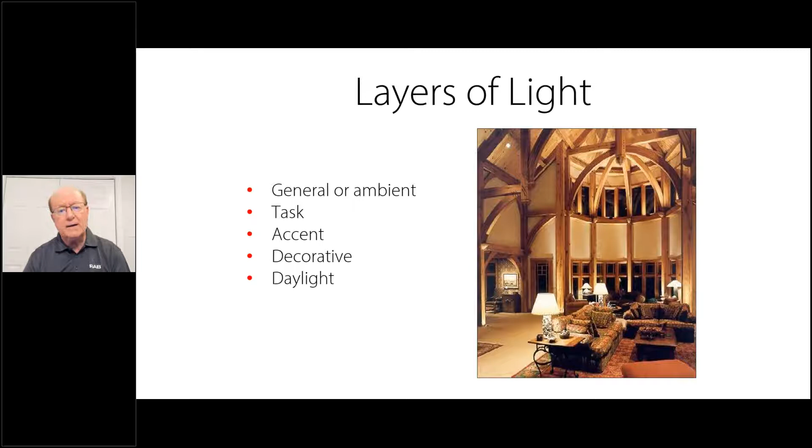So if we take a look at this, let's identify the layers of light in this particular photo. So the first one we have is general ambient. So you have your downlights and you also have your table lamp there. And we'll talk about one more in just a few minutes that I didn't cover right here, and you'll see why. The next one is task. So there's our table lamp for a particular task. We're reading something. Next is our accent over there with a whiteboard.

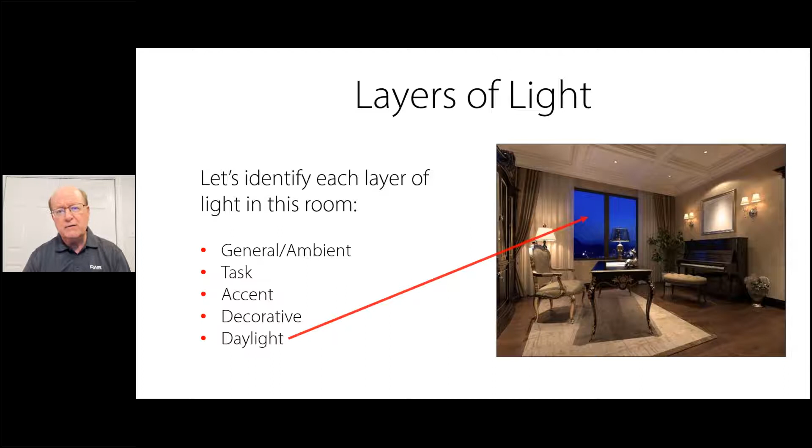And then we've got our decorative, and the decorative is providing some ambient light as well, but it's the decorative layer. And then daylight. So those are identifying what the different layers of light are, and they all combine to make the mood and the setting for that particular room or area.

Now, we have a handout here called What Is in the Ceiling. And so you see across from left to right, recessed housing, junction box, you've got a hole, or it could be just framing. And then down the left side, you've got various products that we offer that can go in and what would go where. So I would invite you to look into this one. It's on our website to find out what goes where as a handout.

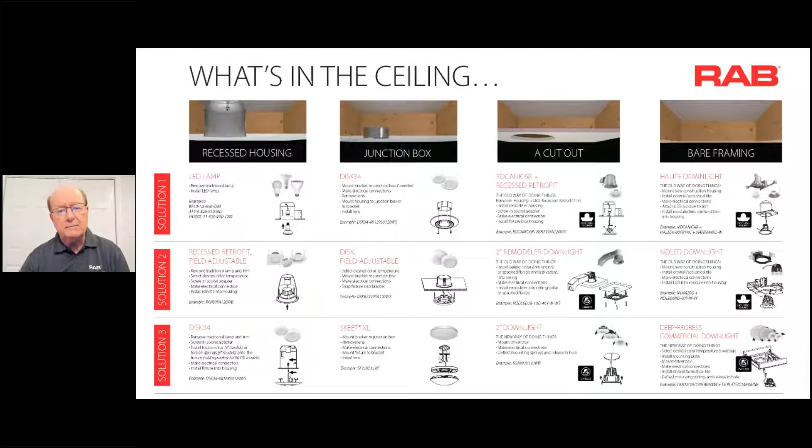Now, the next product we're going to talk about is our SKEET XL. So take a look at this, and it's a low profile, uniform light without pixelation of LEDs. And that's done by the spacing of the LEDs as well as the lens. We have it in CRI of 80 plus. It's TRIAC 120 dimming, and it mounts to a junction box as well, and it provides a wide distribution of light.

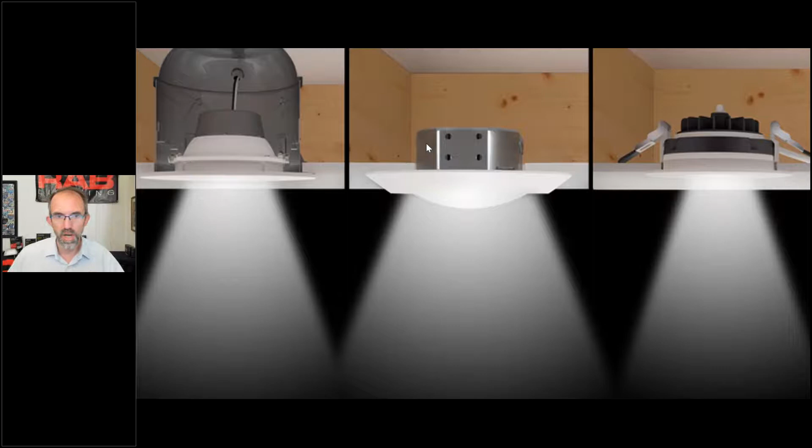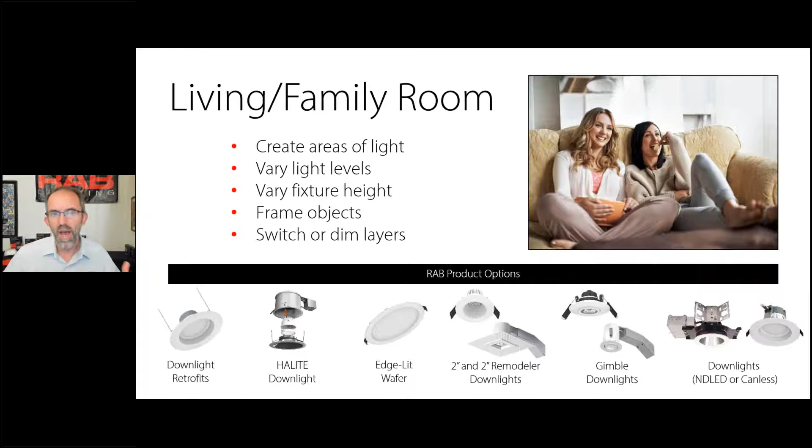Now, why or how would you want to use these different types of light fixtures? So let's look at just the downlight retrofits. The downlight retrofits are for where I need to use an existing housing. You have an existing housing up there in the ceiling. You want something that's simple and easy, toolless, and potentially have some color trims available with this.

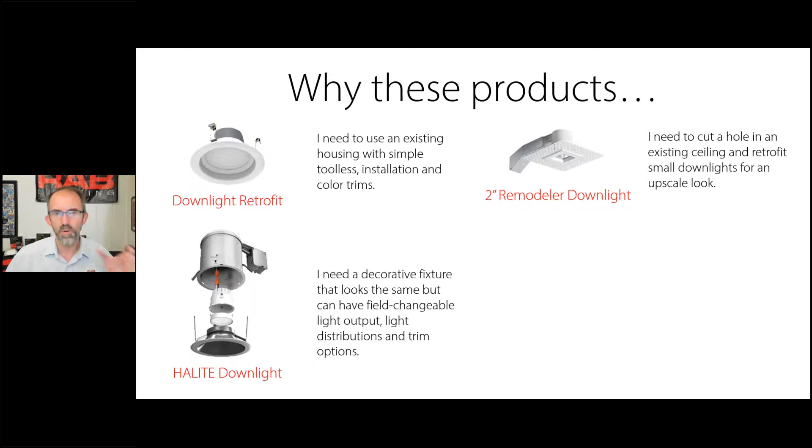The next one: I need a decorative fixture that looks the same but can have field changeable light output, field changeable distributions, and also field changeable trims. So we have the HALITE as a potential option of going up inside and having it be recessed. Next, we have the 2-inch remodeler. Cut a hole up in the ceiling. We want to be able to have a small look to create an upscale type situation.

Next one that I have is the Wafer Downlight. I need a downlight, but I don't have a socket, J-box, or housing. So you cut a hole in the ceiling, you put it right up inside. And the last one is a modified version of that wafer, except it's either a 2-inch version, cut a hole in the ceiling, put a 2-inch fixture up there, or we have a gimbal product. So let me go into each one of these to help us understand why you would want to sell it, why you would want to buy each one of these.

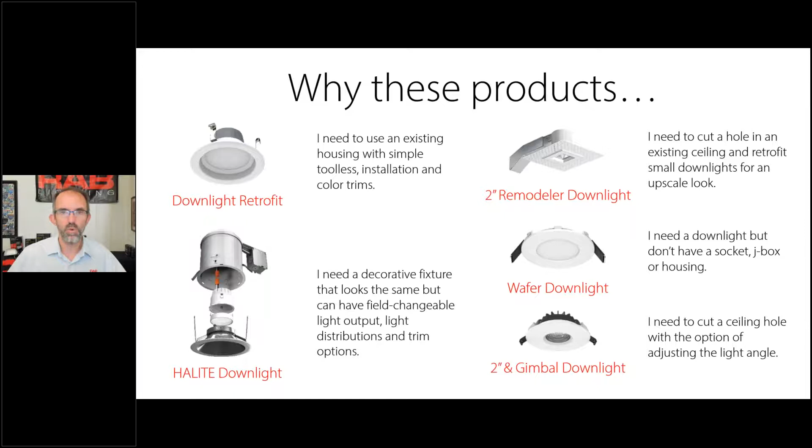So the first one I have here is our retrofits. This is the product that doesn't come with a can. It's designed to go into an existing can. So you have the medium base socket on one side, and then you have a plug, and then you actually plug this either 4 or 6-inch smooth or baffled. On the right, we actually have a baffled version of the 4-inch square or the 6-inch square.

Now, depending upon the size of room and how tall your ceilings are, I would think that in most residences, you're going to be using more along the lines of the 4-inch retrofit or the 4-inch square, these two different versions here. So to make this product even more palatable, we used to only have them available in white.

Now, for the round versions, we actually have a little trim adapter that goes right on the unit. So we have a black, bronze, and a silver trim. It's available in both baffle and smooth, and in 4 and 6-inch. So you can now change the look of that white trim and make it look slightly different depending upon the design of the interior space.

120-277 is probably not too much for residential use, but we do have some versions that go all the way up to 277 volts. And then we can see the field adjustable. So if you have a variety of different customers that have different preferences and you're not sure exactly what that customer wants, you can buy the field adjustable version so that you can tune in the correct light color to match the interior design of the space.

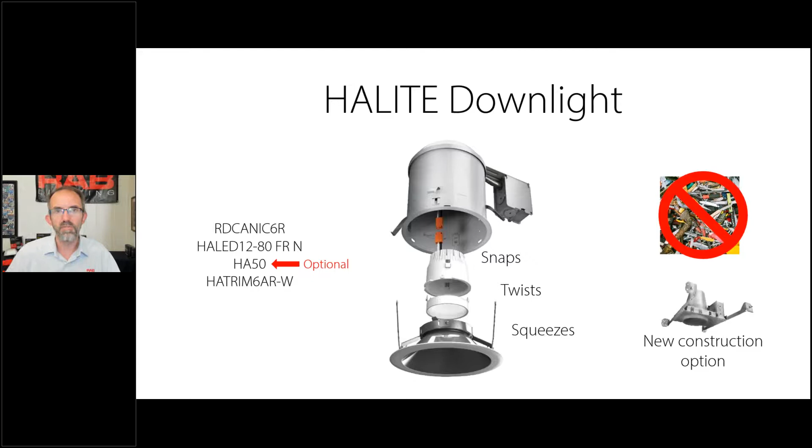And the last piece of the puzzle is the trim. So we have a variety of trims in different colors. The module, the optics, and the trim all snap, twist, or squeeze together with no need for any tools. To get the new construction or remodeler housing up into the ceiling, you're probably going to have to use some tools. But once you get that housing up in the ceiling, everything snaps, twists, or squeezes together with a HALITE. And you get a variety of different styles, looks, light outputs and distributions with the HALITE.

The next one that we have is something we call our 2-inch remodeler. We've had this guy for a very long time. It's been a nice, good mainstay of our product portfolio. We have a little collet: cut a hole in the ceiling, put the collet up inside, make your electrical connections, and you can push this unit right up inside. It can come in contact with insulation.

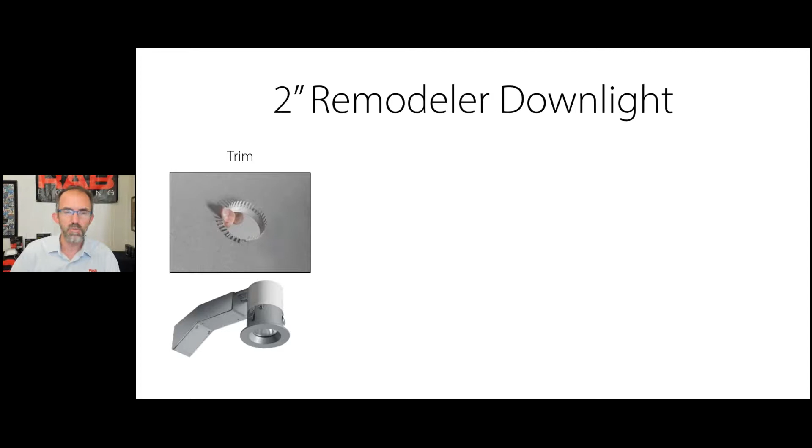We also have a trimless version. So we have that spackle flange that you can screw up to the ceiling and mud right up to it so that you have a nice seamless look on the ceiling. And then we have a new construction housing that uses the 2-inch remodeler inside. It goes up through the hole, and off to the right of that housing you can see a little C-shaped thing. That's where the driver portion goes up through and lands, sitting right on that clip on the housing.

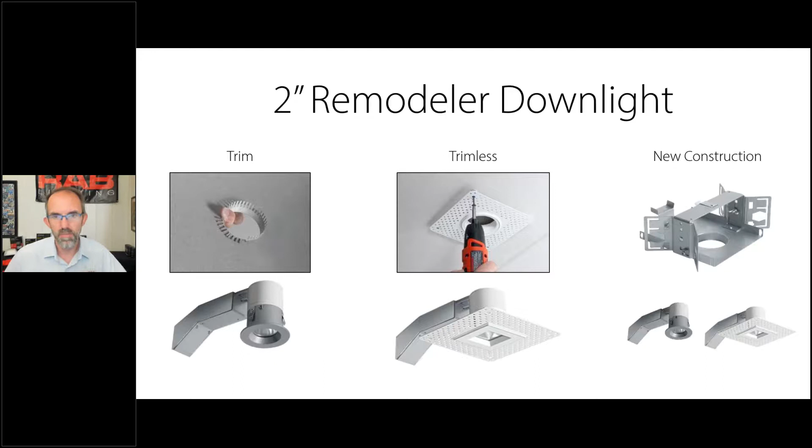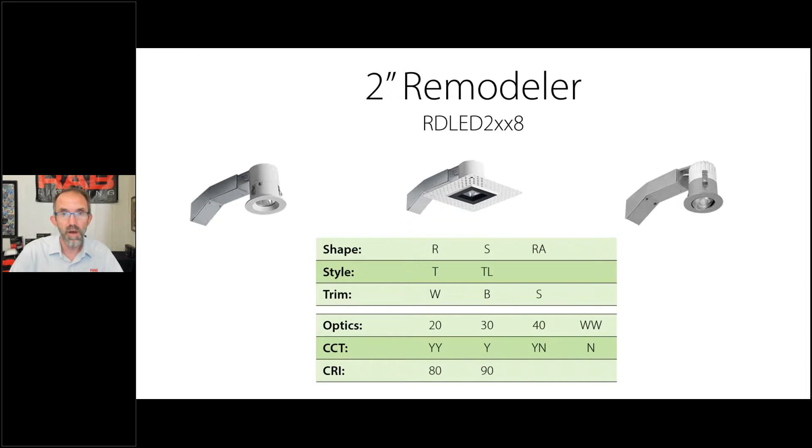Now the power of the 2-inch remodeler is you have round, square, and round adjustable. That's the RS and RA. T stands for trimmed, TL stands for trimless, in white, black, silver. Then you have 20, 30, 40 degree optics with a wall wash version. We use YY for 2700K, Y for 3000K, YN for 3500K, and N for 4000K. And this is available in both 80 CRI and 90 CRI models if you're in California and want that.

Now we do have a deep recessed version. It's a slightly different wattage, a couple watts higher with more lumens available. And because the lens is farther recessed inside, you have more options for the trim and for the cone. So the trim is white, black, silver, and specular satin aluminum.

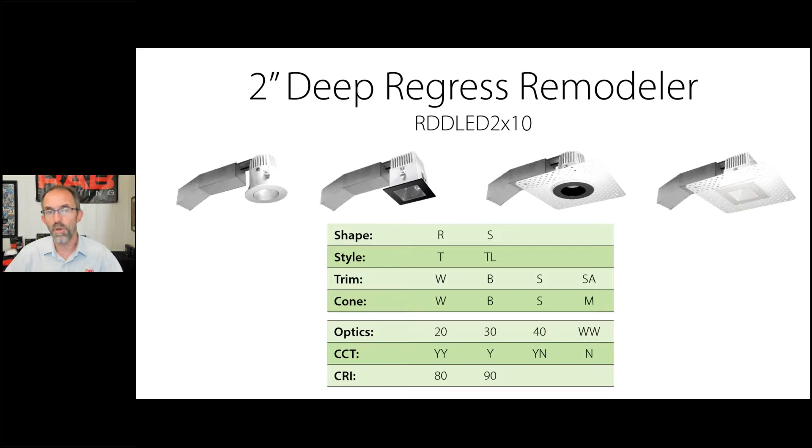And then the cone is white, black, silver, and matte silver, with the same optics, the same CCTs, and the same CRIs. So if you need a specification grade fixture that has a lot of different options, that's nice and small and can tuck right up into the ceiling, the 2-inch remodeler or the 2-inch deep recessed remodeler may be the product for you. Moving on to the Wafer Downlight.

And the power of the wafer, not that anybody's going to use, please don't use an 8-inch wafer in a home unless the ceiling is really, really super high, and probably not even the 6-inch. You're probably going to be doing the 3 and the 4. We do have different styles of this. We either have where the lens sits flush with the ceiling with a little bit wider trim. We have that baffle version, which has a little bit of a ridge and the lens is recessed up a little bit into the product. And that one actually has a little bit narrower of a trim around the outside.

And then the last one, which actually really looks like a downlight when it's installed in the ceiling, but you don't have all the depth of a downlight because even this deep regress smooth with that recessed lens with a wider trim, you have the LED driver and the LED module separated so that you can actually have this installed in very, very thin plenums.

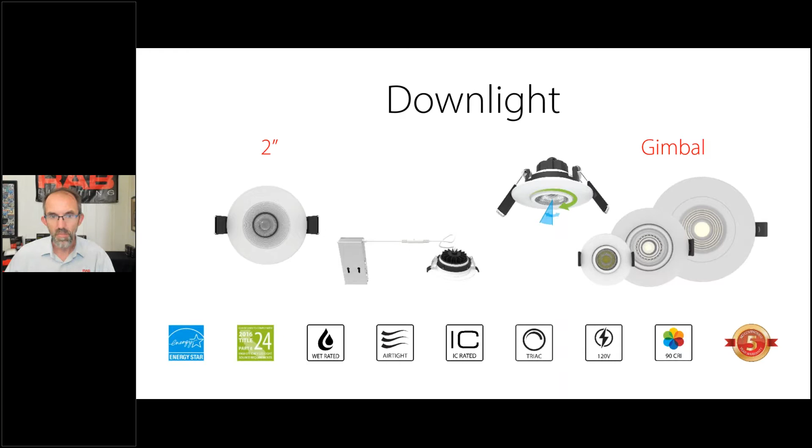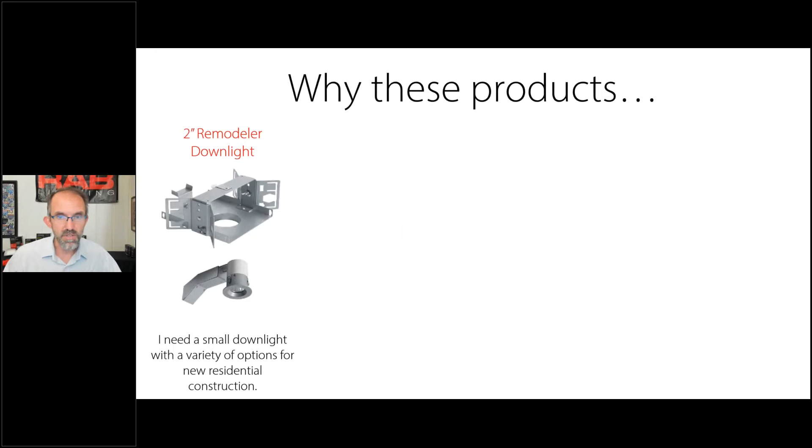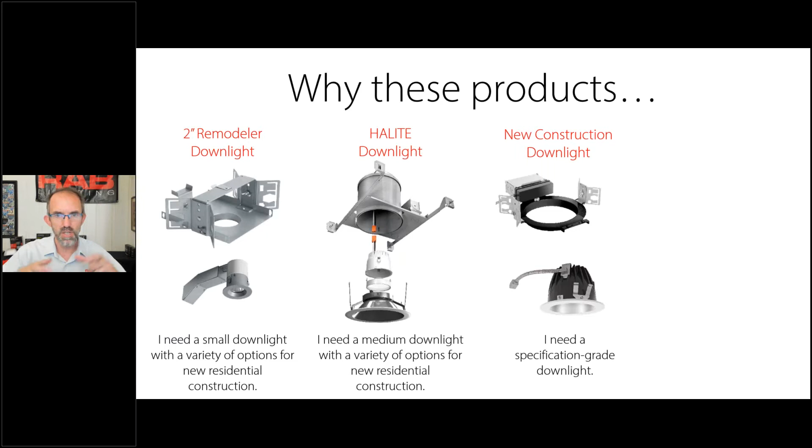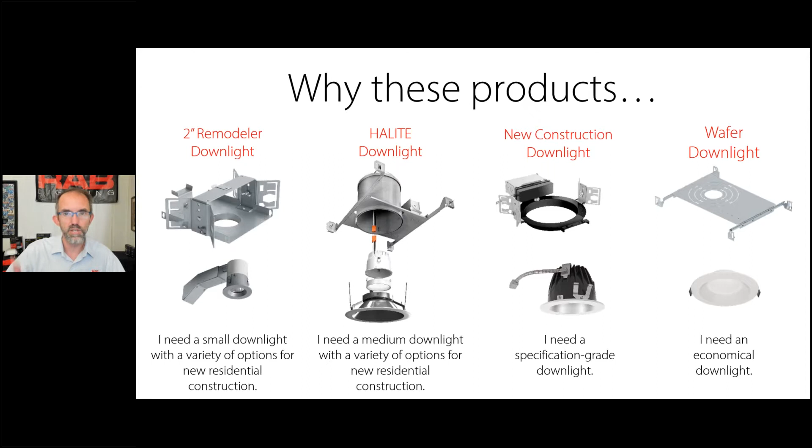So moving on from kind of what you can do from a remodeler standpoint, we do have new construction downlights, new construction versions. We've already seen some of these. The 2-inch remodeler goes into that housing can. We've seen that. We've also seen the HALITE and the new construction housing. We also have a whole family of products that are 4 and 6-inch. If you need a specification grade downlight in the larger aperture size, let's say 4 or 6-inch, we do have that, along with the wafer. If you really want to take the wafer and you want to put it in a new construction, we do have a little adapter piece that you can nail up into the wooden beams and then knock out the appropriate hole so that you can actually put the product up in a new construction application.

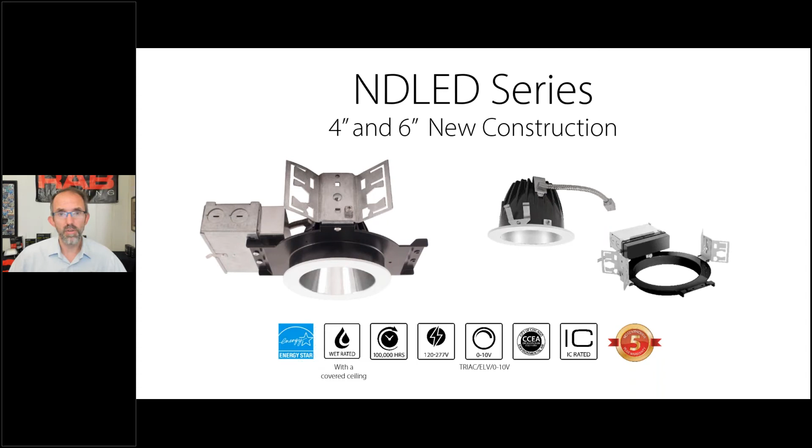But I want to focus on the NDLED series. This is the 4 and the 6-inch, because I've really talked about the other families. So what do we have here? The power of this also is choice. You have 2 sizes, 4 and 6. You have 2 shapes, round and square. You have 4 cone colors: white, black, silver, and aluminum. We have 3 trim colors: black, silver, and white. We have 3 different beam distributions: wall wash, 60 and 80 degree. 3 light outputs: 12 watt, 20 watt and 26 watt, available here in the new construction series that mount right up into the ceiling.

So with that, we have helped you understand a little bit about what is involved with lighting a family room or a living room of all different sizes, the things that you need to think about. We've also talked about lamps, surface mount fixtures, that was Bob's world, and then my world of recessed fixtures, how they look, how they feel, how they go up in the ceiling. And hopefully you were able to sit back and relax and learn a few things as we went through this presentation.

So next week, this is going in line with some of the other presentations that we've done in the past couple months or so. We have all these different compact fluorescent lamps, and they have different base types, and they go into different socket types. And then we have LEDs. How does all this kind of fit together? When I say something like a G24D-2 socket with a specific 2-pin lamp that goes into that, what does that mean? We're going to decipher all of this for you, help you understand what the different base types are and the different tools that you can use to find the correct LED solution that will go into the socket that you are going after.